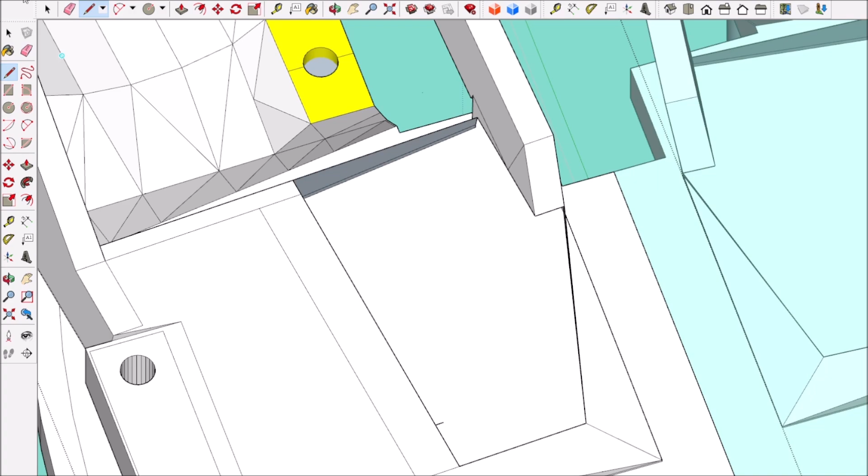But this video here, I'm just going to show you. It's one of these things that when I have these prints available on my Patreon, I want to make sure that the supplies that go into this animatronic are going to be available to y'all, like servos. And I'm doing two different versions of this, and what I'm doing is I'm replacing these servos here with these other servos, and these are cheaper servos and they're available, but I just want to make sure that all the supplies for building this animatronic are going to be available. So let's get started.

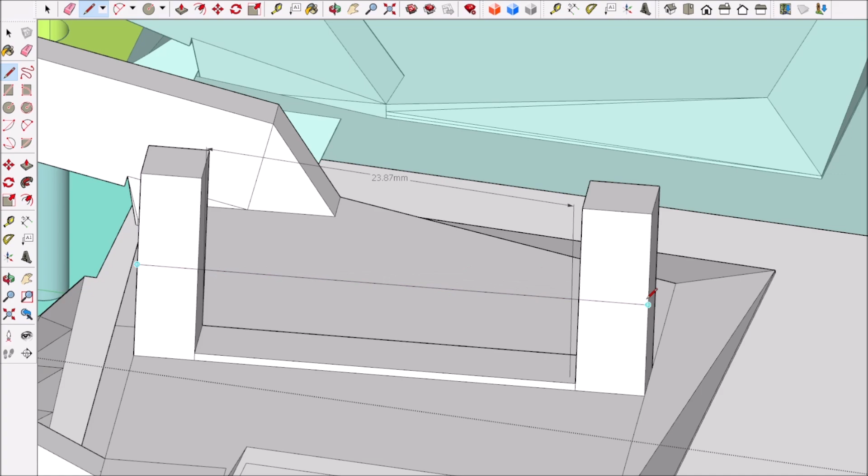I basically just replaced the servo sockets with the horizontal tab screw points. That way, instead of screwing down, they screw sideways. And it's a standard looking servo, because most people don't really realize that wing servos exist. They're pretty neat servos, but finding them small is rare. There's not too many available that small.

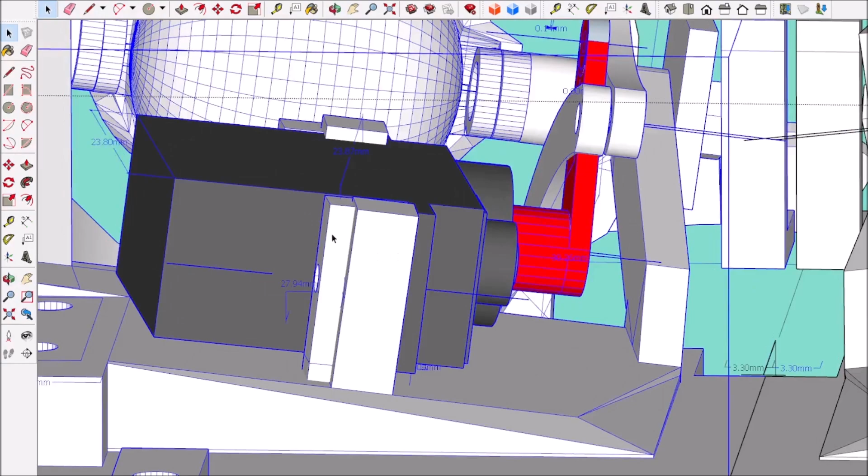And the whole reason why I'm doing this animatronic is mainly to put skin on it and have realistic movement, but for me to put skin on it, the whole bust of the alien creature that we're designing has to fit a resin printer. It has to fit into the printer so I can print that, and then we're going to mold that sculpture or that head bust so we can produce the skin.

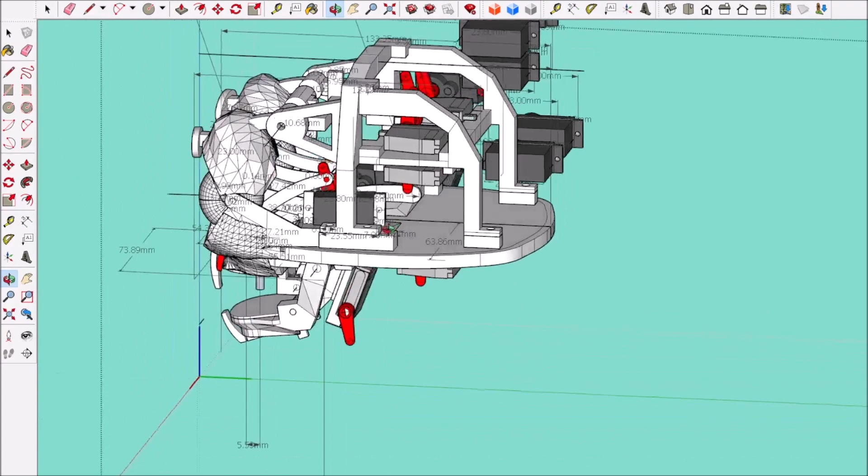But here on this servo, now I just laid this servo in place. With the original wing servo, when I first started designing it, I started with the eyelids and the eyeball, and I worked from there. But it was on a flat plane when I first designed the eyelids, and then I rotated it with that wing servo. Here I'm just laying it in place because the servo is just a part. It's not going to be printed, but it's going to be at the right angle so I can see that the linkage this servo moves is correct to move the eyelids. But mainly it's just to get all the servo sockets in the right position.

Now these servos here did have a servo socket that I had previously designed, but I went ahead and just started designing it straight off to replace it. That way it wouldn't be off, I guess not square to the tilt position it was already in. So I just decided to go ahead and design it from here.

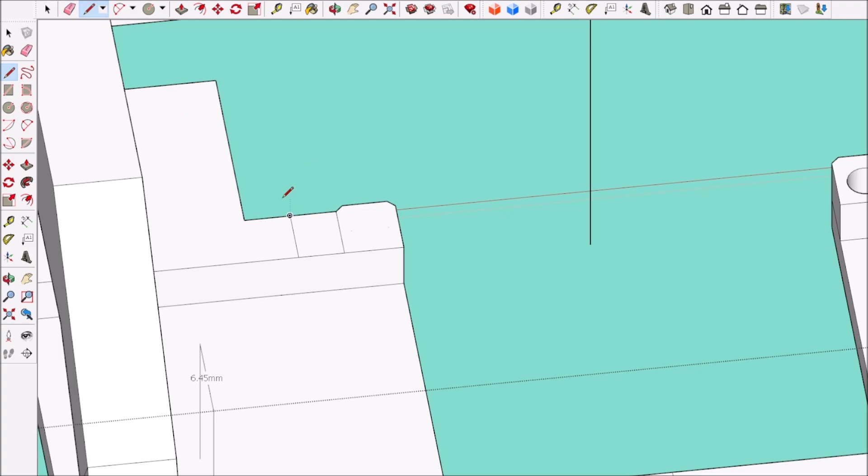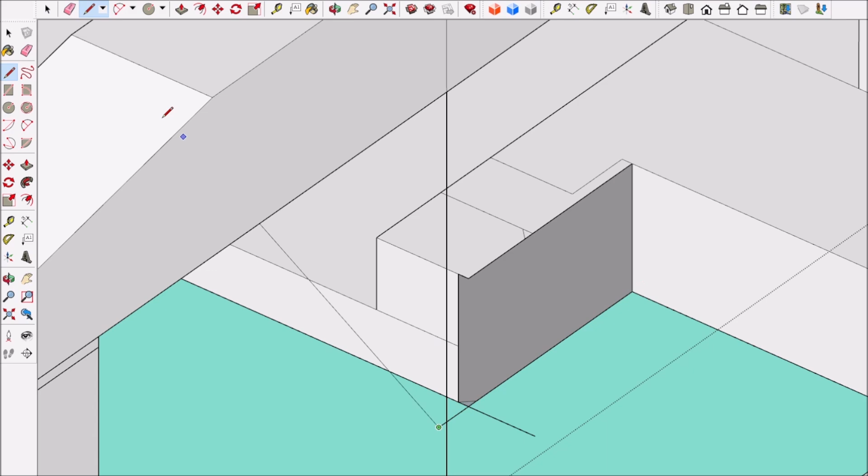But like on the scaffold, I just removed the screw points and squared everything off, and then adjusted and made these little posts, I'll call them, and they just come straight up so I can put screw points there. And then I also have to look at a profile view to make sure that I can get the screwdriver to go that direction, so I'll have an access point to that screw. But it was quite simple to do. Like I said earlier, it was only 2 hours of work to replace all 8 servo sockets. I just wanted to show you, and it was pretty quick and easy.

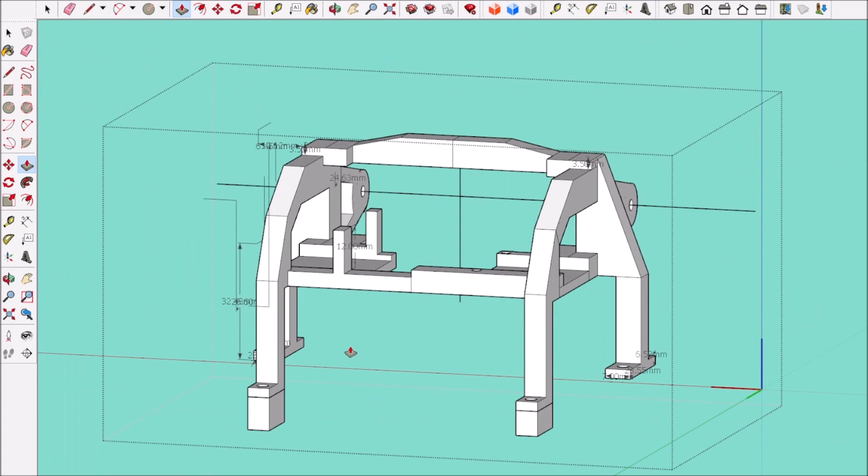But I've not got a final design yet. It's getting close, because I've been working on this not quite a month yet, and it should be getting close to start finalizing all the designs and getting ready to do some test prints, just to make sure that all my servos have the right socket, because there's tolerances. Like if something is 30 millimeters and you're going to make a socket, you can't make it 30 millimeters. You should make it 31 millimeters for the socket because you need it to go in, and that's basically called tolerance.

And when I'm designing these things, I print primarily with PLA, and eventually I'd like to print something a little bit stronger. But these tabs might be a thickness of 6 millimeters, which is okay, but I still like, I'll go 7 and maybe 10.

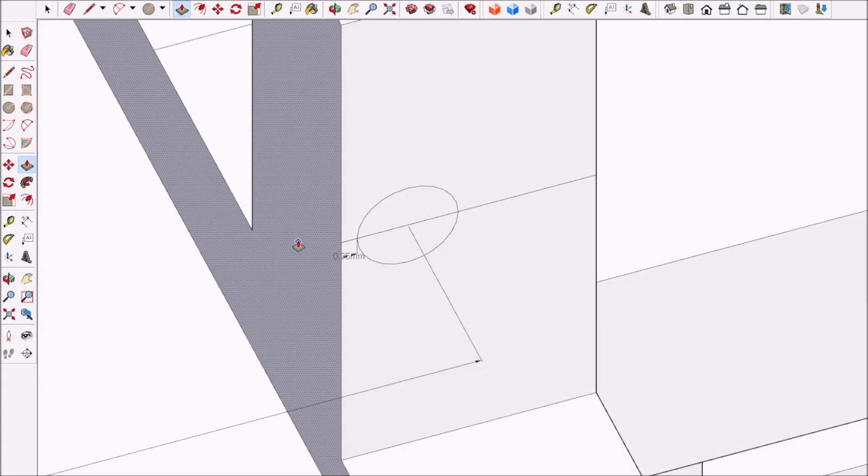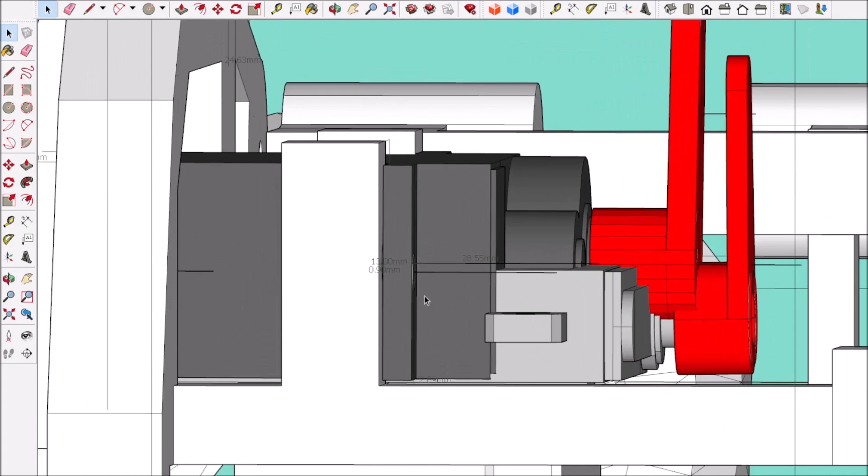But then there's other things that you have to calculate. Depending on the servo, they have a grommet coming out of the side where the so-called servo arm is, and that grommet is like a little rubber gasket around the wire. It's 1 wire, but it's 3 wires, and you've got to make sure you have clearance on that post, because if you stretch out that post too far, you're going to bump into that wire and it's not going to work. But that's just foreseeing what you need to do.

And when you do enough of them, you get where you don't want to mess up. And that's why I keep designing and redesigning. And plus, I want y'all to see what I do to produce this, so some of y'all are going to be true designers of what you want to create. And that's the whole goal of this channel, I want you to see what else you can make with a 3D printer, instead of making benchies.

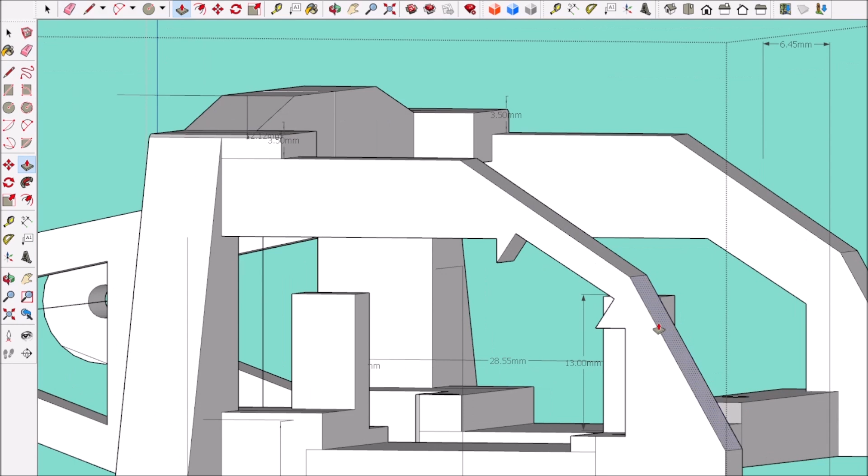Now this creature that we're making is going to have 11 servos, and that's going to be 10 channels that we're going to be controlling. So 11 servos and 10 channels. The reason why it's 10 channels is because 2 of the servos are going to be mirrored. So two servos are going to be on 1 channel for the eyelids, and they're going to be mirrored with a Y cable and a servo reverser.

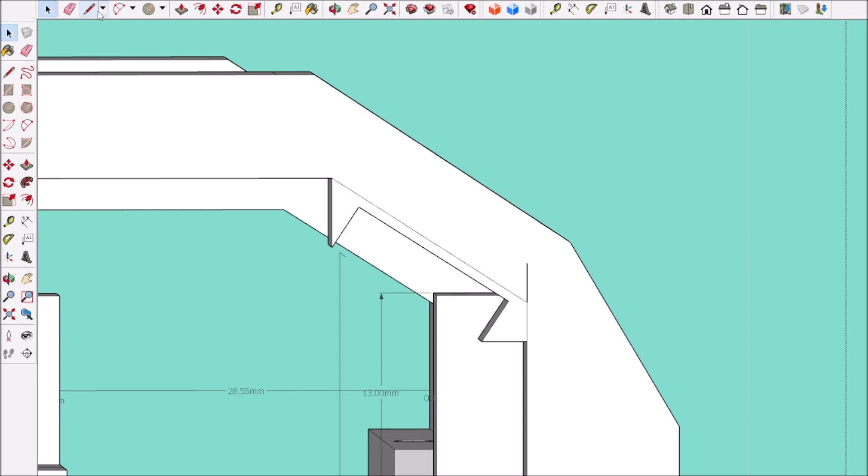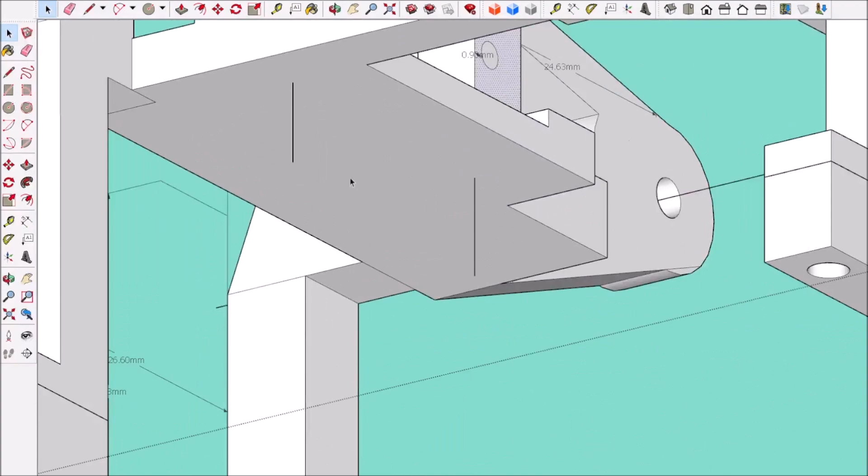Now, on this scaffold right here, I'm making adjustments so I can make sure my tool can get to the screw point or the nut where I attach that servo to the servo socket. You'll see me sometimes on these videos studying what I've designed, and what I'm primarily doing is lining up that servo to what that servo is supposed to be moving. And I can put the linkage on the servo arm on the top or on the bottom. That way I can control it and have space to work with where I'm placing the servo socket.

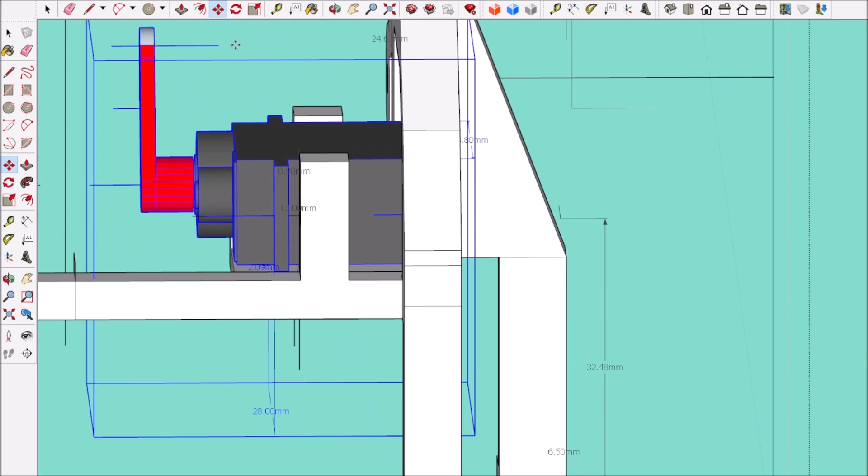But here is what I'm concentrating on: if I just do one side, I can mirror the other side, because I noticed I have another servo on that side, so I'll just cut this in half, and it'll be less work and more accurate. But I don't want that servo too close to the other servo, because I don't want those servo horns to bump. And like I said earlier, I can put that linkage on one side or the other. It all depends on what kind of room I have.

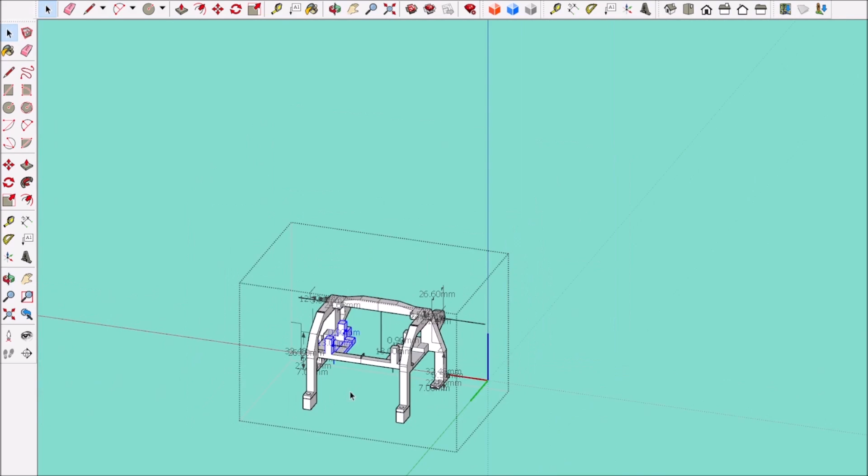You can see here how I'm lining up the servos that are going to be lifting the brow. I have two brows, that's those two servos we just replaced. And now I'm going to place a servo on the bottom of the left one here, and that servo goes to the upper center lip. To make it easier, I highlighted this servo socket that I just made, duplicated it and flipped it, so I could put it underneath there, and that is going to lift the so-called center lip.

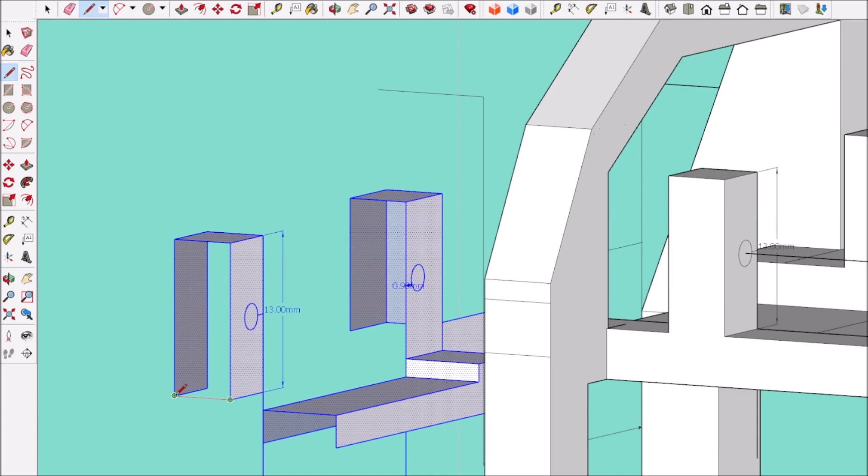I've been designing a lot of these animatronics where it's pretty much line of sight, where the linkage is straight on to the servo horn. Now, if it's up or down, I can curve and rotate or angle that linkage arm to the part that I'm trying to move.

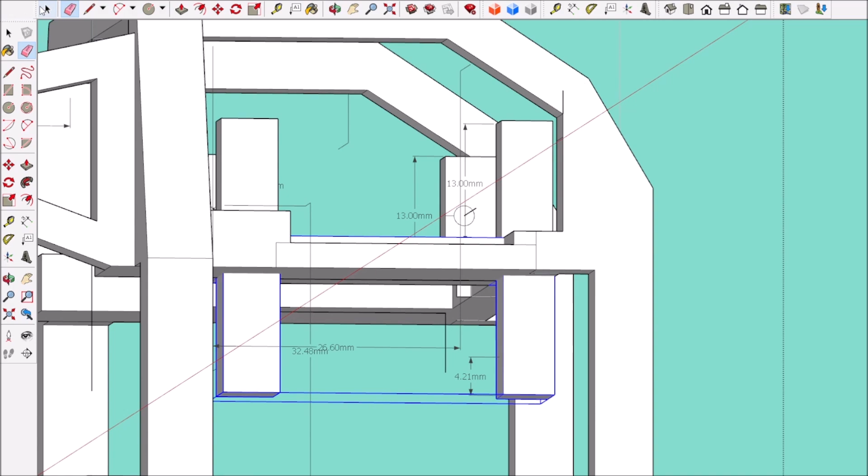I just clean up this servo socket and get it right, then I do a flip and make any adjustments that I need, and I can drag the whole servo over there and fit it into the socket. But this one here, the other day I designed a linkage arm to this servo to move that center lip, and now I can push that servo socket closer to that arm, move it a little bit more to the right there, so it will line up in line of sight.

You know, basically I just kind of laid a lot of the servos in there before, on top or inside the other servo, the wing servo, and I just removed those servos after I get it designed, because I'm kind of matching up the servo arm, because they're basically the same shape. They do have the same screw points, but these are sub-micro, micro.

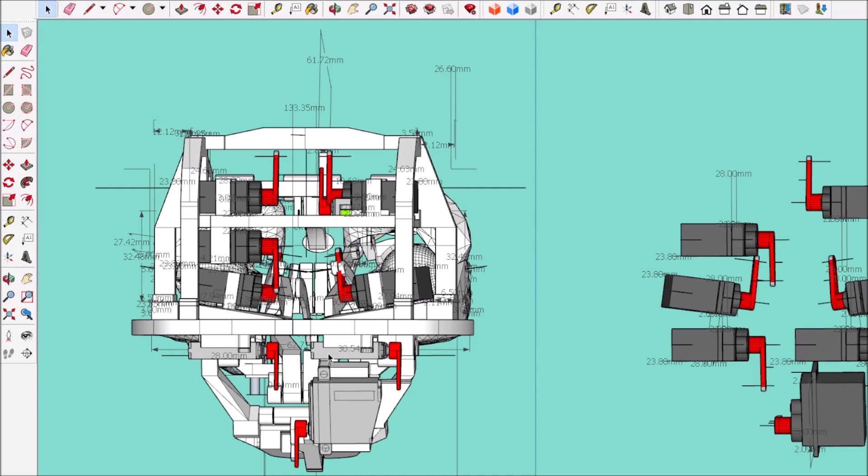Now you'll find out that with servos, once again, there's nano, there's sub-micro, there's micro, there's mini, there's standard, and then there's large, and then there's giant servos. And once again, there's thousands of them, and there's thousands of manufacturers. I'm saying thousands, but a lot of them are rebranded servos. You'll see a lot of servos where it looks like the same one, but they got a different name or manufacturer name on it.

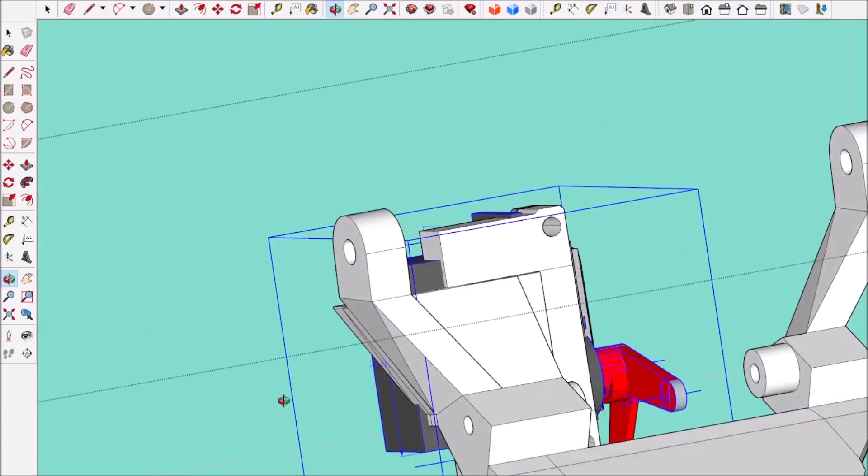But there's some servos that I just don't bother using. If you've seen the cheap servos where you can get 20 servos for $20, I don't even bother, because even if you just buy one, it either is too loud, or it's just not dependable, or it's no torque. And don't get me wrong, there are some good cheap servos out there, but when you're moving something, you got to really study the torque, and I do a lot of tests, and I test some of these cheaper servos just to see what they could handle.

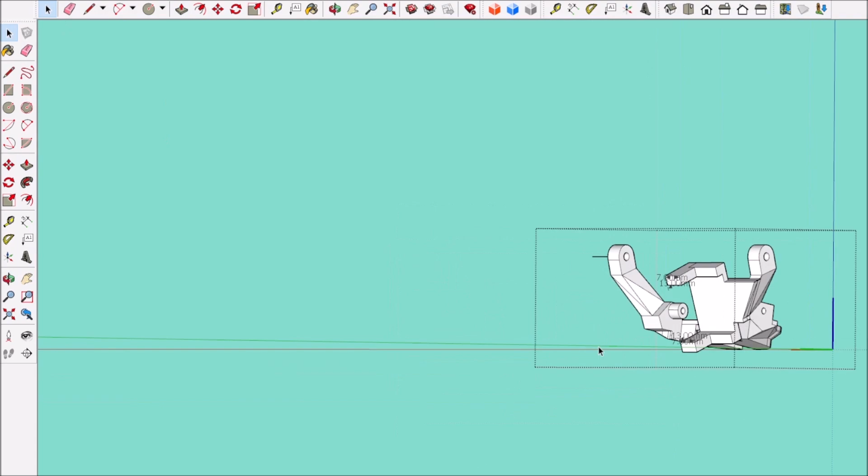It's just like that little creature that I made. It was a small creature and had 3 servos in the head. Those servos had enough torque to move that thin skin, and this skin's also going to be thin, and I'm sure it's going to move it, because the torque on these, they're really good servos, and I've been using these servos that I'm putting in here for about four years, I believe.

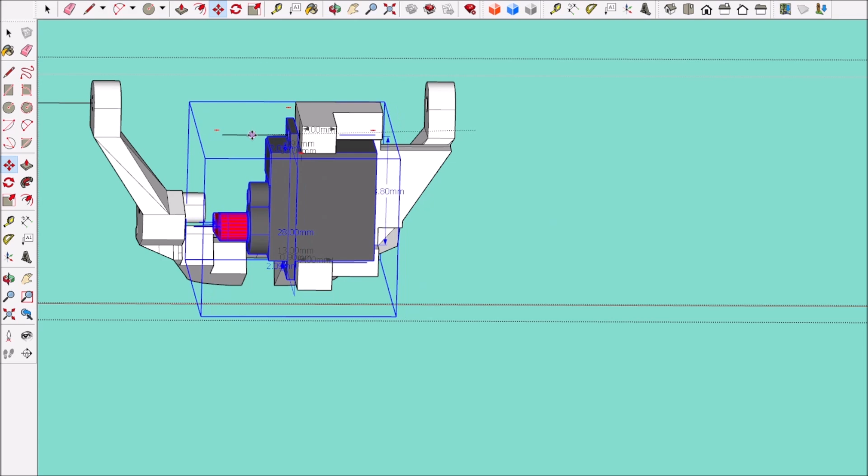But replacing the servo on the jaw, this is where I have to make adjustments to this servo, because the wing servos are 6 millimeters thickness. These servos are 12 millimeter thickness, so you're looking at double the thickness. But they'll still work, and it's going to be hidden behind the jaw. So it shouldn't have any kind of interference. That one servo there on that jaw is there to move the lower lip.

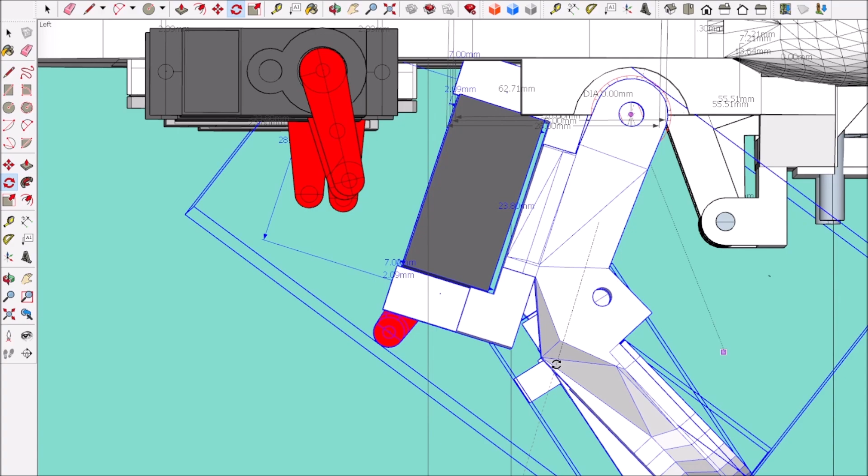But you see here, I'm going to have to make adjustments to the so-called servo socket, because I'm only able to move it 30 degrees opening. But when I had the 6 millimeters thickness of the other wing servo, I had more room. I mean, there's only a certain amount of openness that you'll have on a jaw anyway. But I can make adjustments so we can get at least 40 degrees.

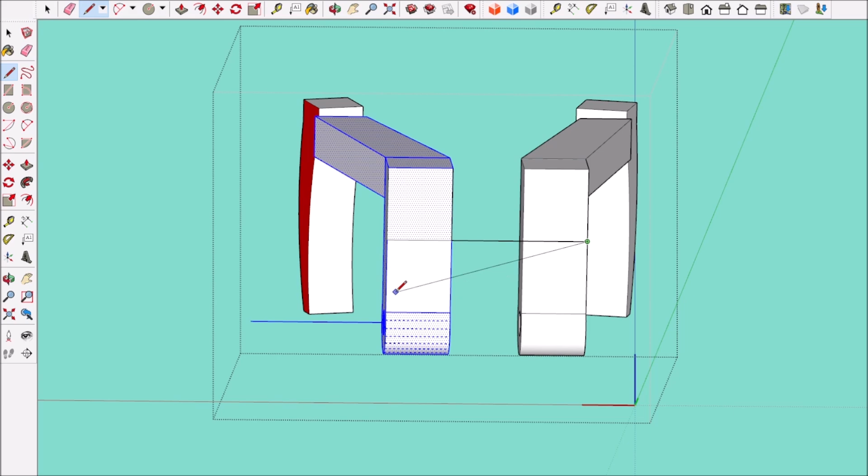And being in the design stage right now, I could change the jaw by lowering it down some, but I would have to make adjustments to the teeth, and that would be another design of the teeth. But I have them on file, so I can just manipulate those to fit that socket.

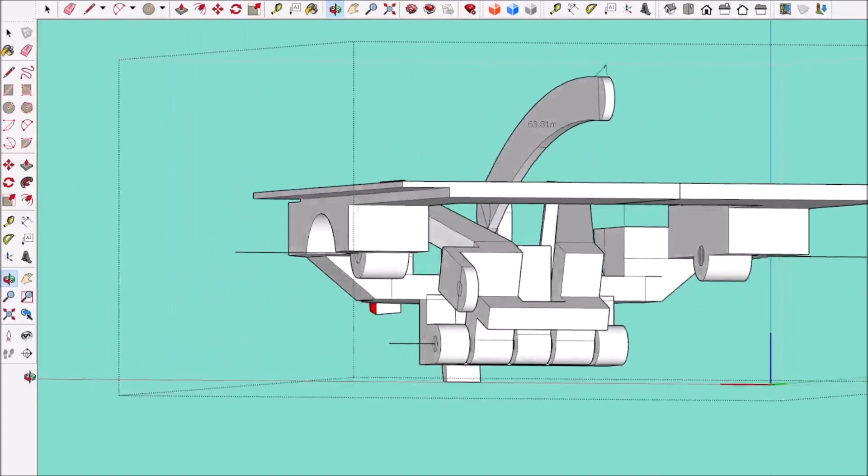Now this upper center lip, this is the fork lip. I have to add this piece right here, and I still need to make adjustments. Because I'm using the same axis to rotate the center lip and this fork lip, I needed to connect the two, so I had to make a crossover beam. That way it will have the two as one. But I still need to make adjustments, because even though this is up and given clearance, if the fork is down and the center lip is up, you don't want it to bump into that support, that so-called beam.

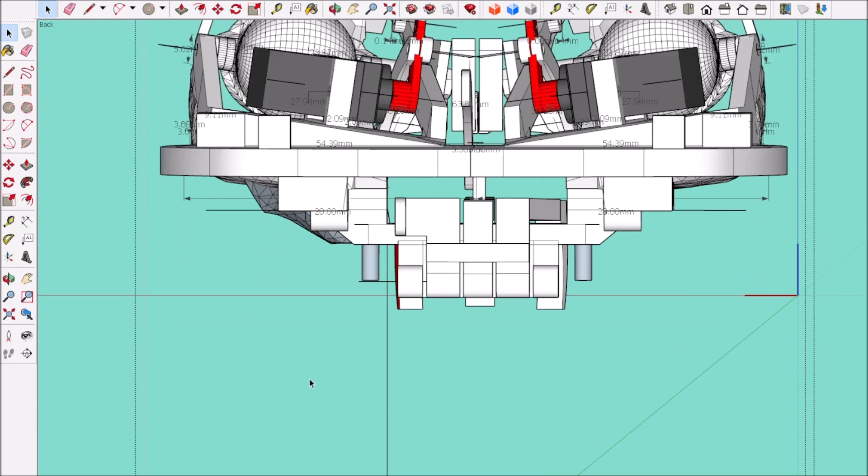But here now, I've added that tab there, that linkage tab, to that fork. And I just need to make sure that it lines up to that servo where it's going to be on the bottom panel right here. I have two more wing servos to replace, but also I'm moving this jaw to make sure it has clearance, not only from bumping into those servos, but I need to make sure it's not going to be bumping into any linkages either.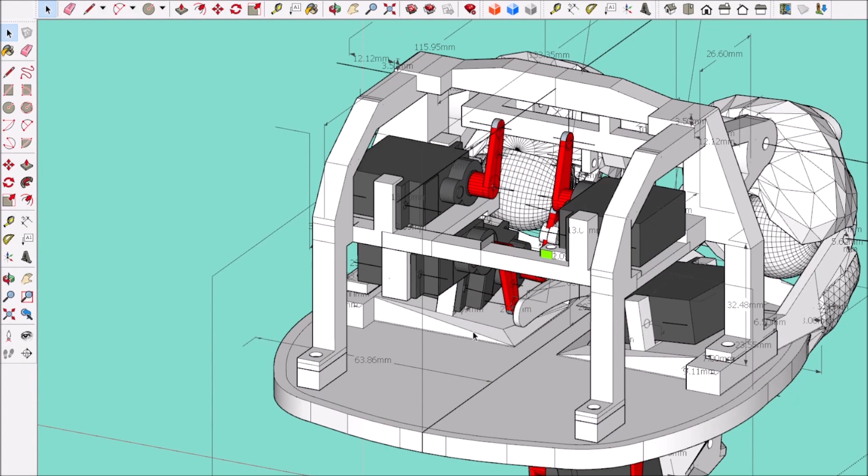But here you can see where I'm moving that. This is the center lip. And with these servos now being thicker and bigger, I really don't have a whole lot more room to put others. Now, don't get me wrong, there's going to be other animatronics we're going to design, and we're going to load them up with a bunch of other servos in it. But if we have small servos, we can have a lot more space to work with.

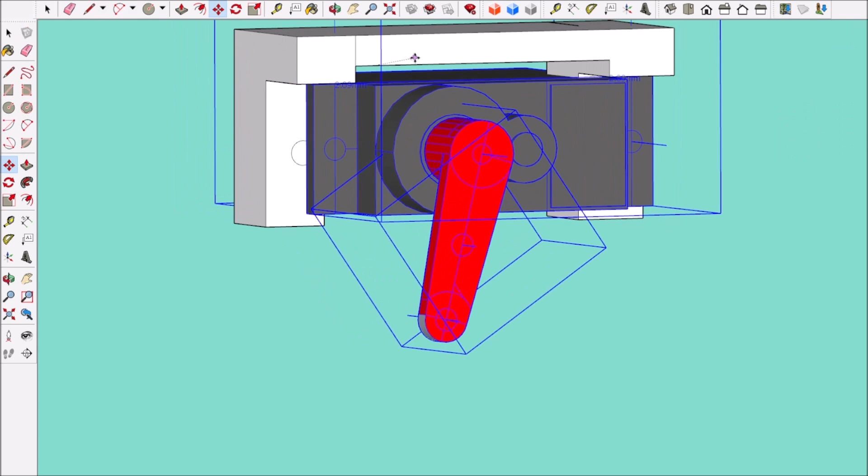But once again, to have that lower lip move also is a big key of having realistic movements. And I had to make the servo work directly, mechanically on the lip instead of using a guitar string or a cable push-pull method. It's more subject to fail, in my opinion, and it's better to have a hard linkage going directly to it. And the only way to achieve that is you have to mount the servo onto the jaw itself.

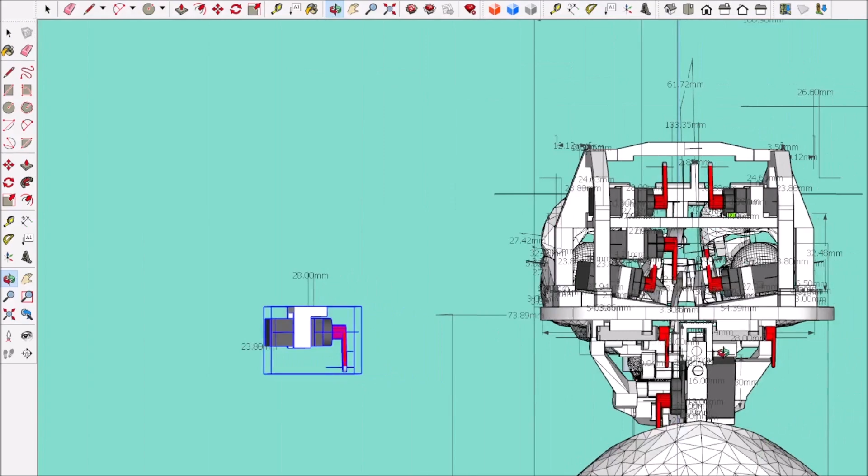It won't mechanically work that way if it's not on the jaw. If you had it off the servo, it would have a conflict with the jaw servo. And so when the power's on, the servo arm is locked because it's in a lock position until it's commanded to move.

But I wanted to show y'all this process. I wanted to show y'all the whole process. I know some of y'all maybe just like printing, and some of y'all like designing. I just want y'all to see the whole process. And like I said earlier, I might have been working on this a month, but a lot of this stuff has come from my previous designs.

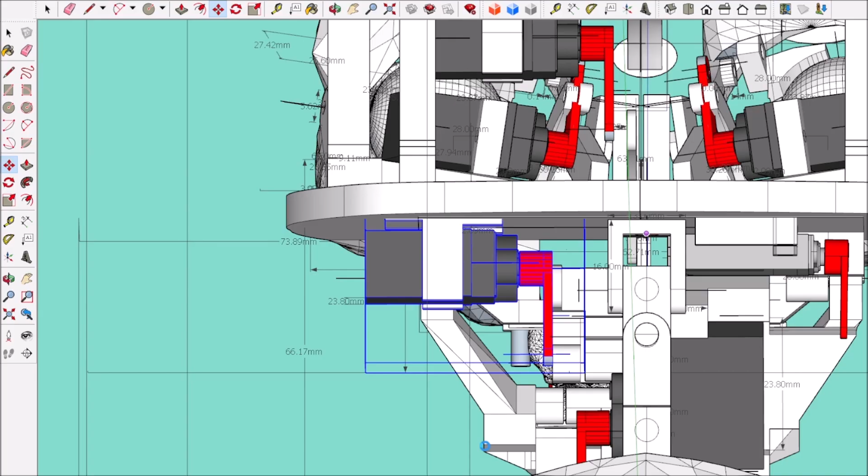And we will go through a whole setup in a future animatronic build, where I go through the whole process from start to finish, from a sphere to the eyelids and so on and so forth. And like eyelids, there's two different kinds of eyelids. You got a blink mech, and then you have a floating eye mech eyelid, where you have eyelids designed with countersink holes where there's no straight-through rod going through the sphere and the so-called eyelids. There's that method too.

I'm willing to share my knowledge that I've accumulated on doing all this, and I learned from it, and I learned from my mistakes too. And trust me, you will make mistakes, and you try not to. No one doesn't.

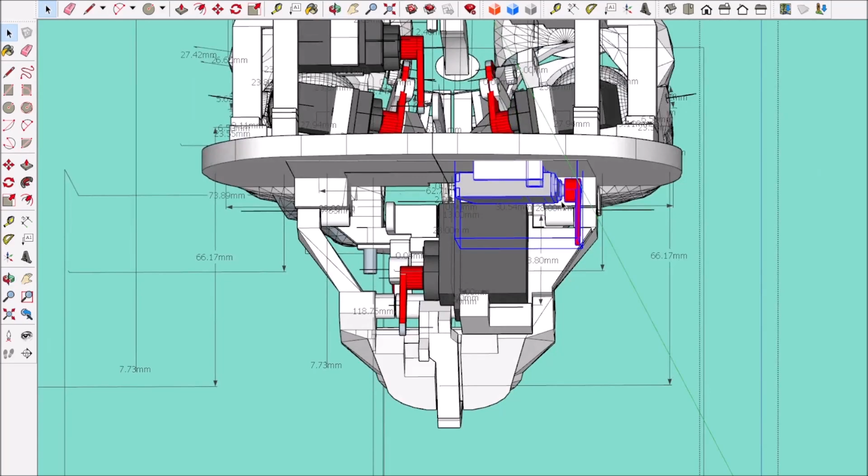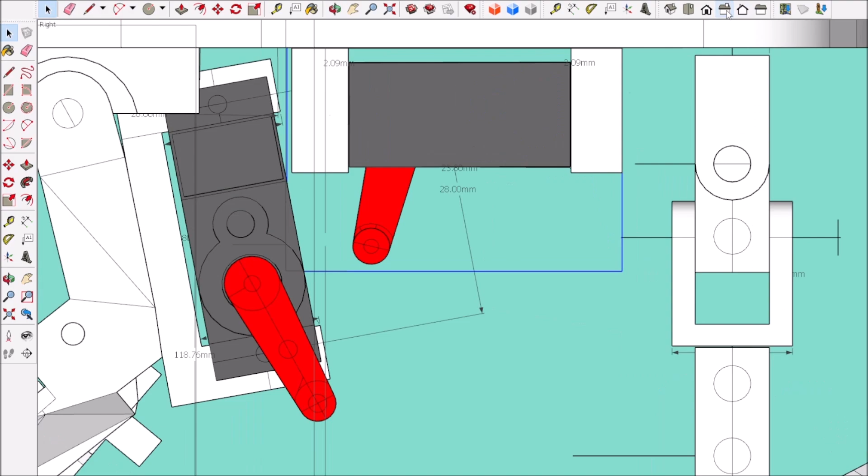I had a person ask me a question today. One of the subscribers said, should he get ZBrush? Hey, ZBrush is a great tool, and they have subscriptions, so there's a cost factor there. And this channel here, I'm trying to do it as low cost as possible. There's a lot of great software out there, and some are free and some are really expensive. Trust me, there's software I'd really like to have. But once again, it's a learning curve for every software. But Blender is free, and it does pretty much everything.

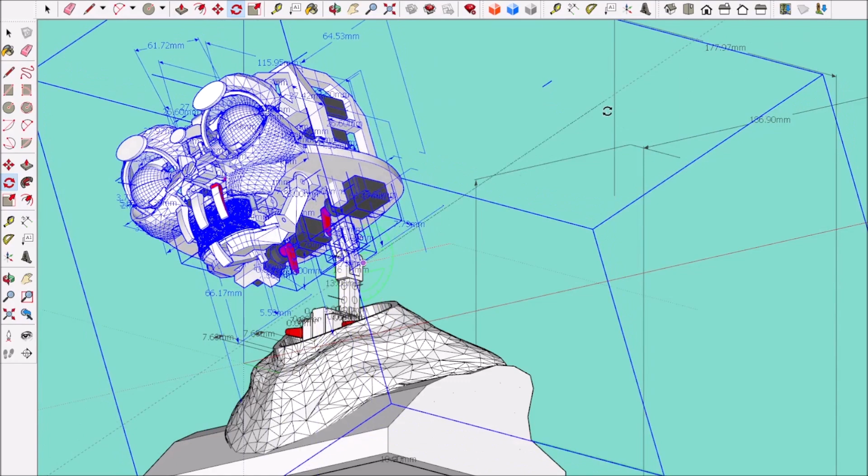But there's pros and cons to every software, and there's some that are really good on measurements. The only reason why I got, I guess, obsessed with SketchUp is I like the measurement tool. And when you're designing these animatronics, I love how the metric works. Probably 4 years ago, I was doing everything in Imperial, and I kind of learned that when you're designing anything, it really needs to be in metric.

We all have the passion for animatronics, and I really enjoy animatronics and love designing them. But there's like two types. There's the kind that you design from something, like you're working outside in. And this creature that we're doing here is inside out. So it's kind of reverse engineering.

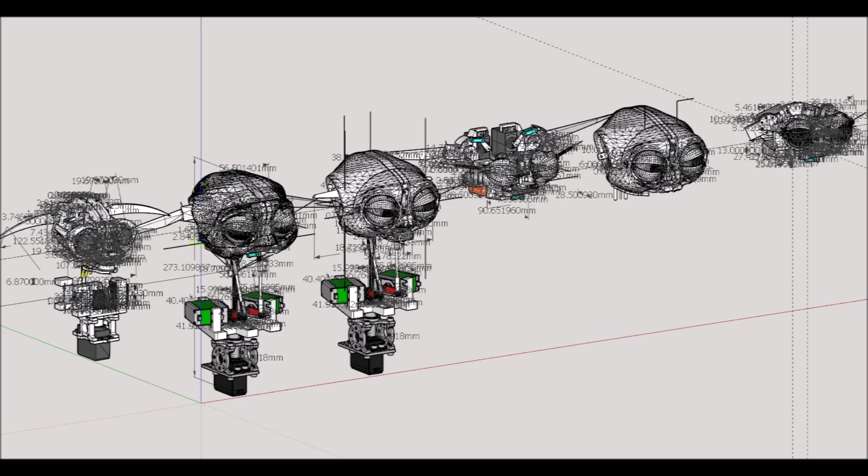But I designed several Grogus, and a lot of people had certain measurements that they thought it was, and nobody really knows except the original designer. But as you see here, I made a lot of them. It was a challenge and fun and a learning experience. And after a certain amount of time, you get kind of tired of doing Grogus.

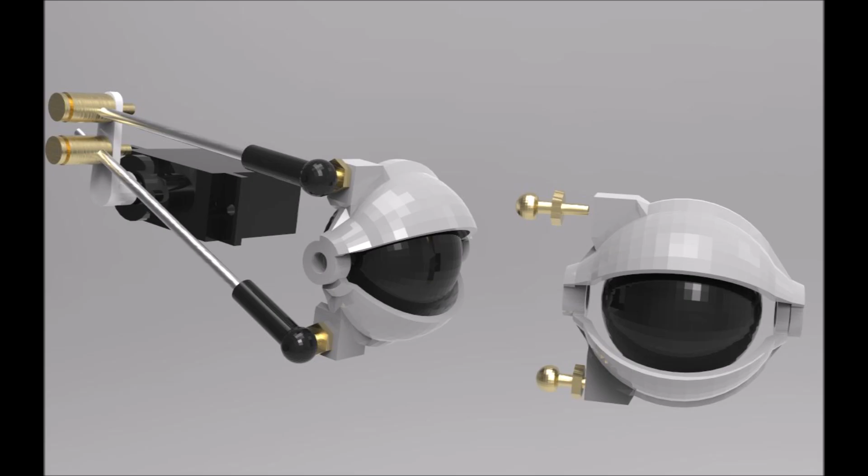But as you see here, I had to get a part from it, the magnet part, the socket, so I could put it on the alien creature that we're doing now. But this is what I would send to the people that would purchase my files: a kind of instructional video on how to put this Grogu together, and a lot of these parts have disappeared.

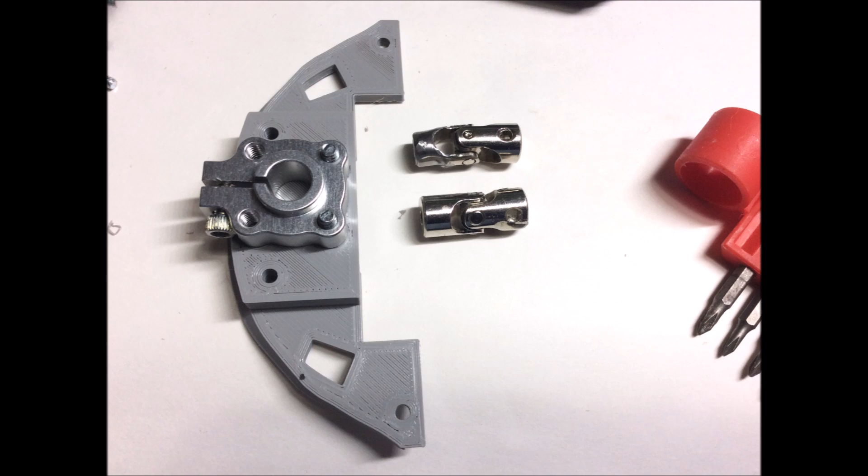And as far as ServoCity parts, they were pretty much Imperial, and now they're going all metric, and some of their metric parts won't fit it. So I'm going to have to be redesigning this and probably put it up on the Patreon, and that will probably be later on. But I just wanted to show you this process, what I went through on designing some of this Grogu stuff. But it was an experience.

But I would send this instructional video and some pictures just to help them put this thing together, and they would experience the world of animatronics.

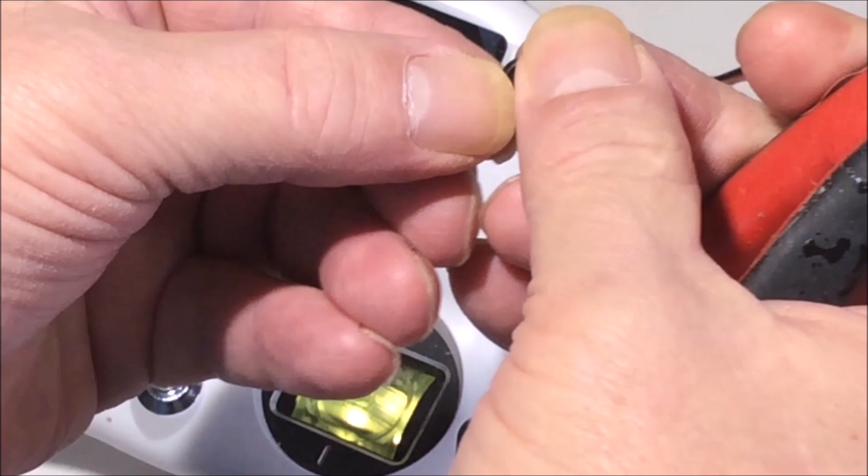Centering a servo: power on, it will automatically center. And then this is a servo horn that we're going to use, and what I'll do is I'll just snip off this end of this arm right here, and then I'll line it up to where it needs to be.

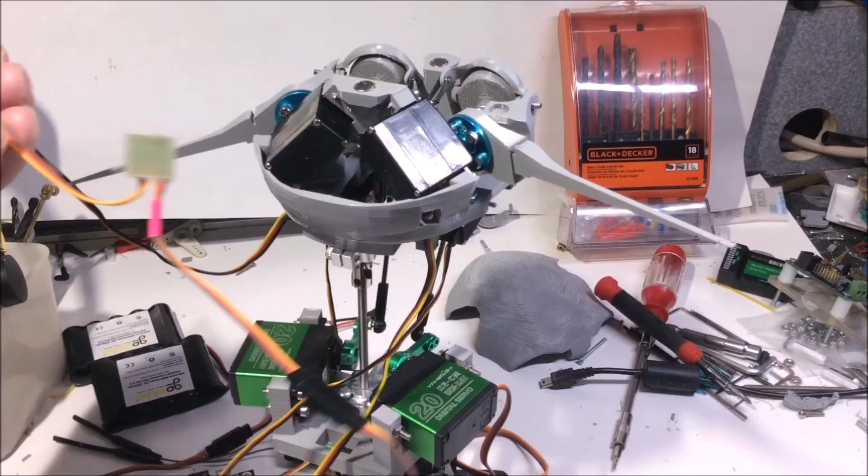This is connected in the ear servos, which is the 225 Mighty Mites. This is a Y cable. A Y cable is where you connect one normal and then you add a servo reverser. That way you can mirror the servos, as you see here.

Here is the linkage for the eyelids, as it's connected to the eyelid controller, and it's kind of a loose fit. It's still tight with the nylon nuts. This is the metal servo arm, or the disc. I never could find the right thread.

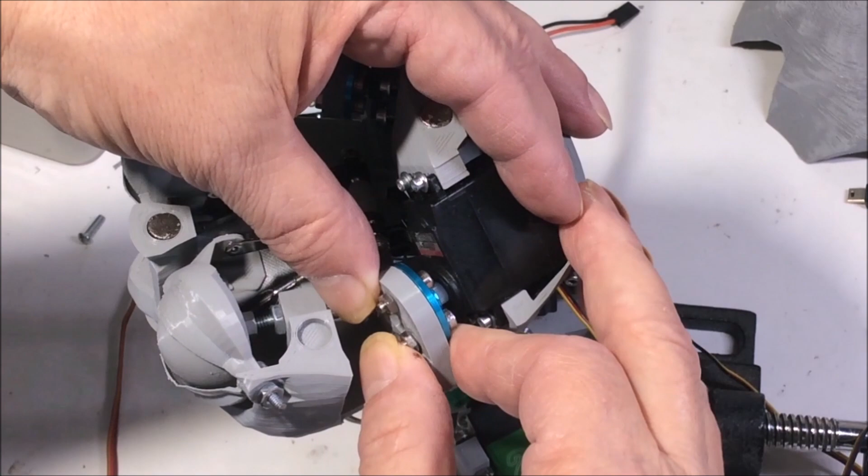It was M2.5, so I just went and drilled them out and put M3s, and then I'll just place it on here, so I can mirror it to the other side, and this has the Y cable with one of them having the reverser.

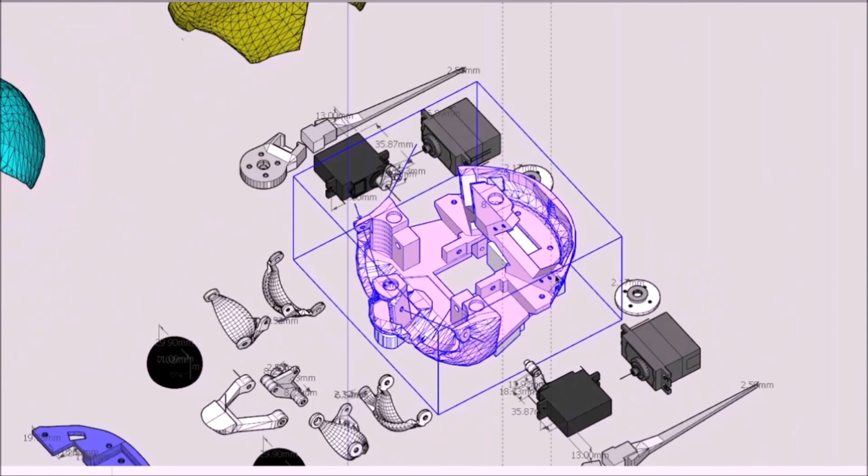Hello, this is Gary Willett. I'm going to show you how to put this thing together. And this is all some of the hardware and some printed pieces. With the ear servos, I'll send you some other parts for the ones that are going to have real skin on them, because the long pieces of the ears are mainly just for looks. You won't use them in actual skin because they won't tolerate it.

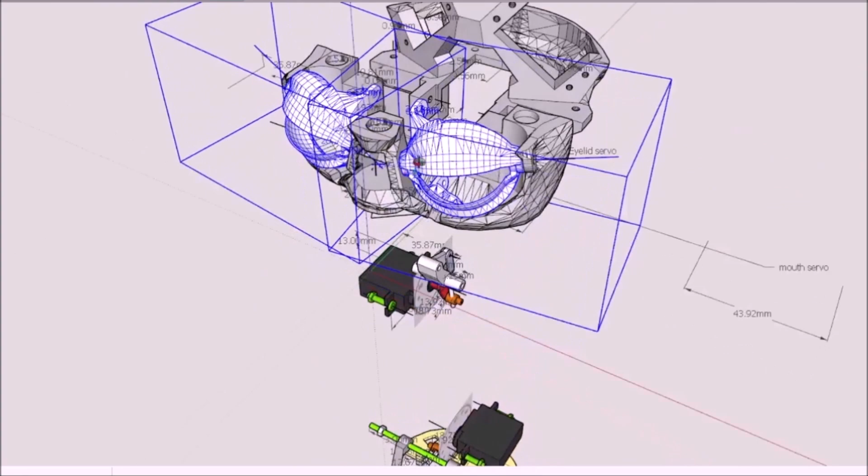It's not strong enough. And the upper lid and lower lid will have magnets and one will have pegs. But this is the main unit. This has all main servos and controls. And the eyelids can be kind of fun to do and can be kind of tedious because there's really not a whole lot of room in there, but I have made smaller. But you just put them in there one set at a time.

Then you kind of open the eyelids after you get them all set with the flathead screws. And these screws are 4-40 screws. And on the outside, and maybe on the inside too, you could probably use nylon nuts. But once again, I just open these eyelids up, and this is the closest I can really get to show a quicker way without the messy bench.

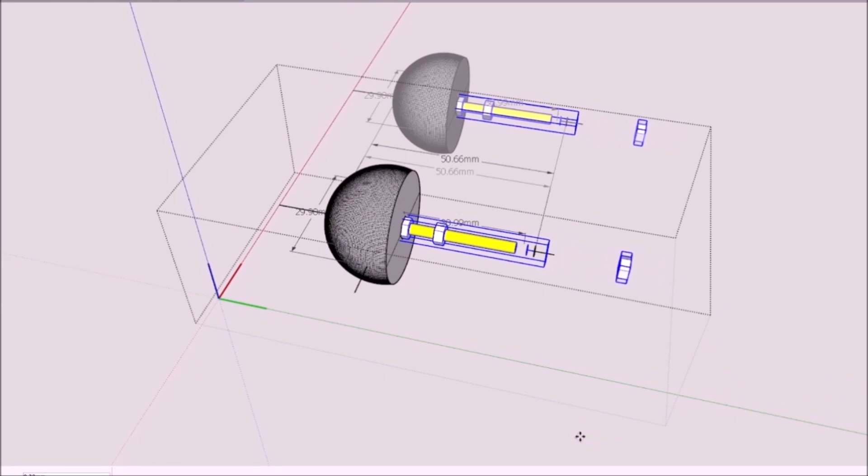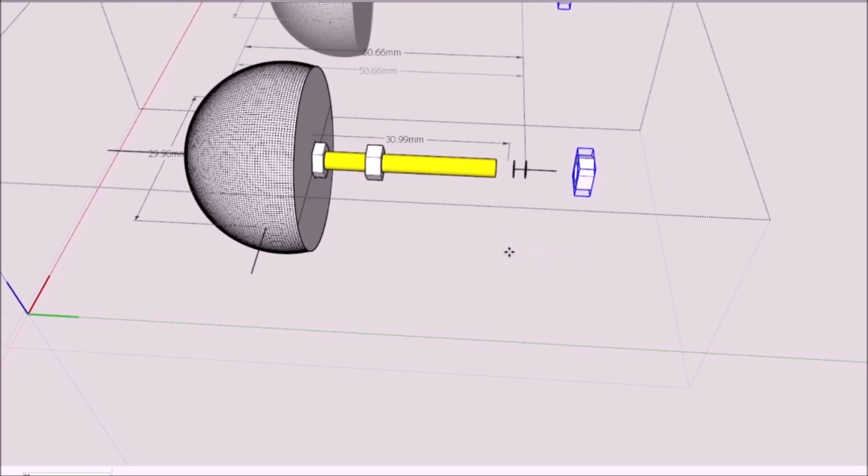And these eyes here have a standoff, and this rod here is a 6/32 thread rod, and you just have that 6/32 standoff, slide it in place, and it can be a tight fit. And if it's a little loose because the tolerance is really close, you can just drop a little super glue or a little epoxy on there and keep it in place.

But you just pretty much thread it on through, and then you tighten your pressure nut, and then put on a nylon nut on the end if you prefer it. I just don't want it to back out, especially if it has skin on it. It's going to be a set deal. Excuse me. But just finding the tools to get it in the small space.

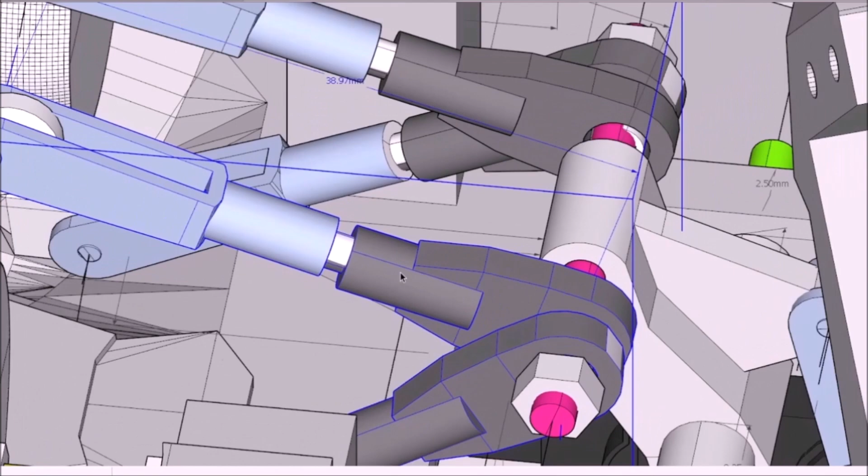But it's really fun. You can probably put this whole thing together in a couple of hours. But as you see here, the distance between the eyelid and the eyeball can get pretty close. Now the linkage here for these little ball joints.

Now for the upper lid, these ball joints need to be cut. And this rod on these is the 256 rod. And I cut about maybe 4 millimeters off of it. You'll still have plenty of room to thread it in there. And then you just kind of remove it.

And you can do it, I didn't do it with mine. I'll show y'all a picture. But it works out good. I mean, it's making linkage to make it work and be more reliable.

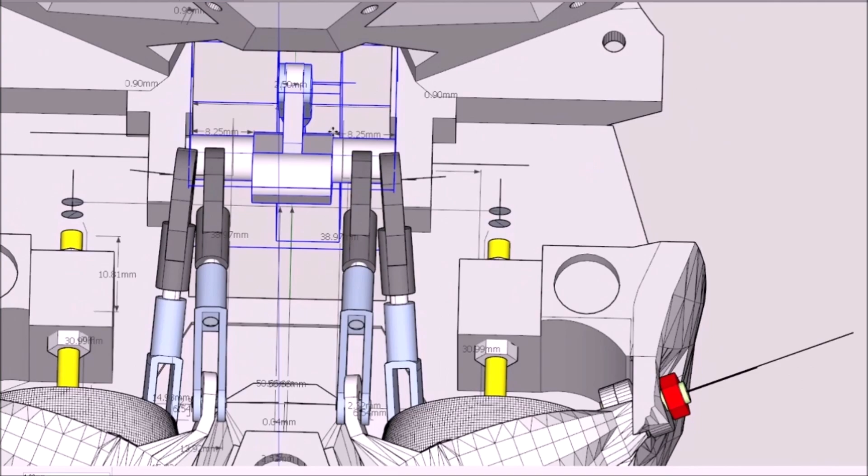Now, the eyelid control mechanism is here, and you'll have a rod that will go through, and its main rod is a 440 rod thread. And you might be able to find a screw that length, but I couldn't find them at even a local hardware. I know they have 3-inch, but you could probably make it. But in my designing, everything is metric.

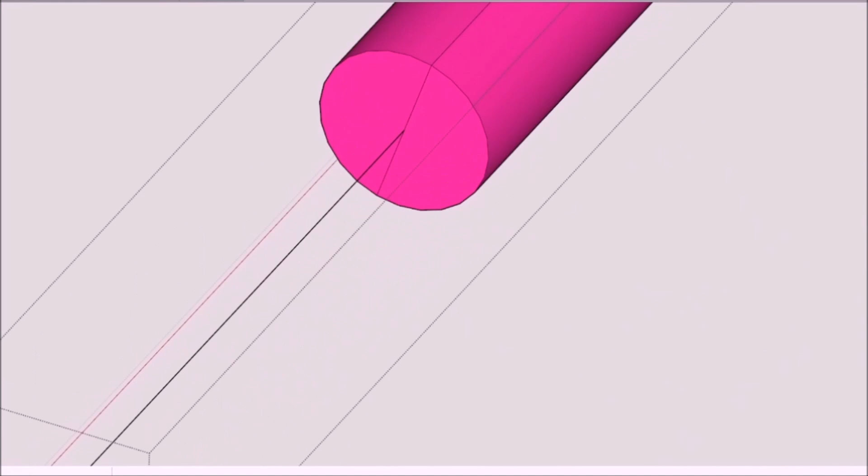But once again, you just put that rod on there, and you'll seal this off with the nylon nuts, and then you make sure your upper is first in the thread, and the lower lid is on top of the upper lid. And then you put these nylon nuts on, and don't tighten them up against the ball joints. Just make them tight on the rod itself, and leave it loose. You can touch a little bit, but not put a bind on them.

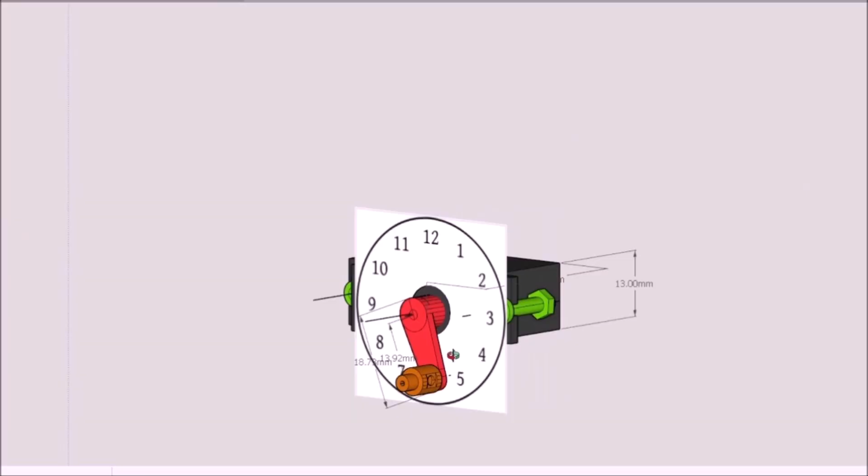Here is the linkage for the eyelids, as it's connected to the eyelid controller, and it's kind of a loose fit. It's still tight with the nylon nuts. And then as far as setting the servo up, I put this little clock on there just to show you. It's basically at like a 5 o'clock position, but you need to turn the servo on first, make sure the servo's centered, and then you put your arm in there.

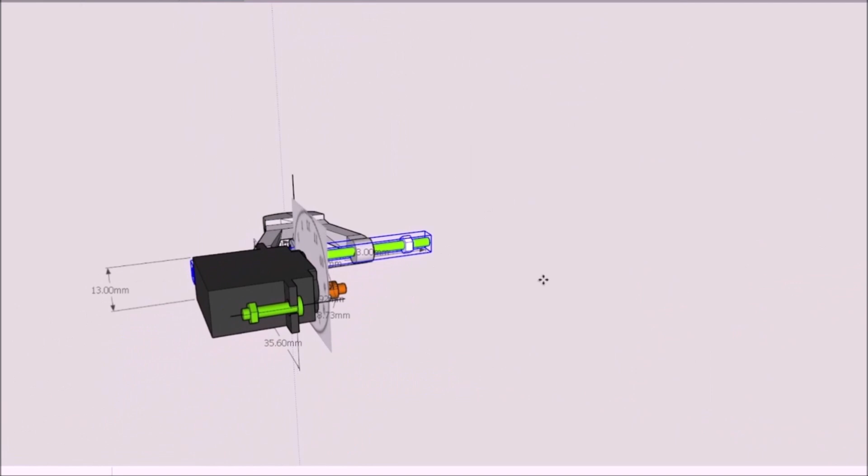And then that stop link, that's the little brass fitting that's on the servo arm. It will thread that 256 rod to the linkage, and it will be tightened down to hold that in place. Sometimes them holes are not large enough for the 256, and you can just drill them out with a drill. Just make sure you remove your screw, and then drill it out, and it'll screw back in place to give a tighter fit on that 256 rod.

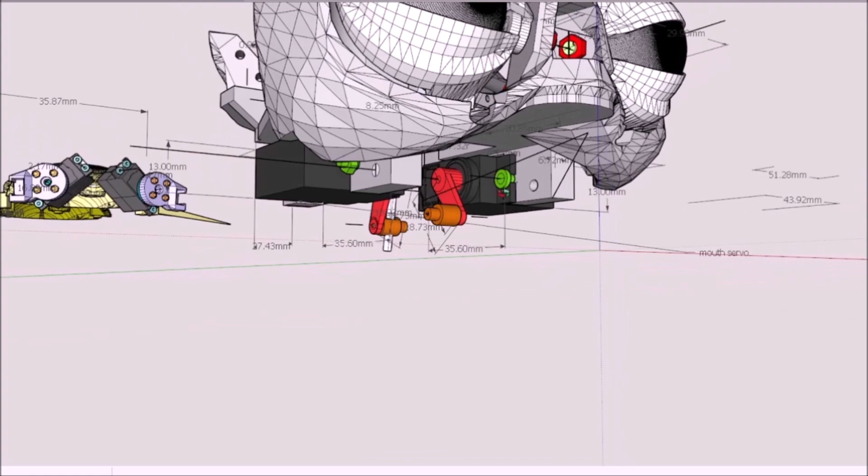Now, the screws that I have on these lower servos are 440 screws, and you just bolt them down. And then you center this mouth servo, and it's at more of a 4:30 position, and then once again you power up the servo, making sure it's centered, and then you set your servo arm. And it's basically the same way you did the eyelid servo, but you have them opposite from one another.

And then you put the mouth, and the mouth also has a 440 support rod or hinge mechanism rod. And then these parts here, I'll send you these parts. These are the newer parts I made just the other day, because I've been working on the core, and they were coming out of the core skin. But these are 440, and that connects to the linkage for the so-called gimbal. And this is the gimbal mechanism.

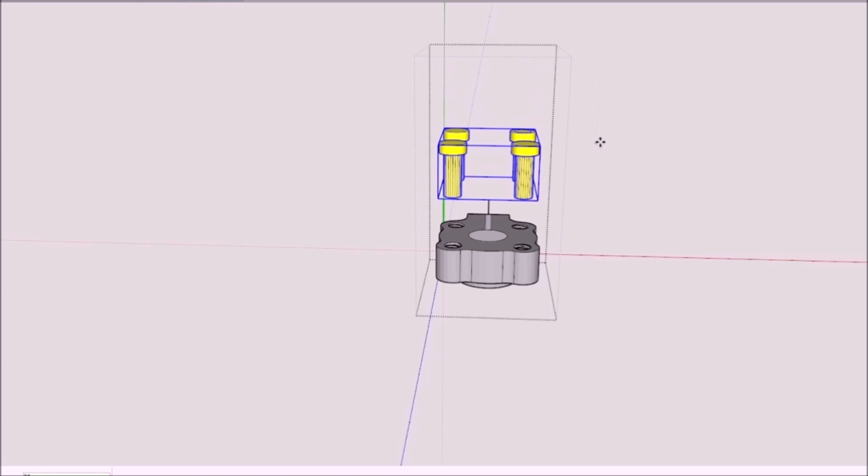This is the main support of the skull that's supported by the gimbal. And these little hubs, these are 256. No, I'm sorry. These are 6/32 screws that hold, and this is from Servo City. And they've made some recent changes to the size of these U-joints. They used to be like 9 millimeters in diameter, but now they've changed it on me. But that's what y'all have ordered.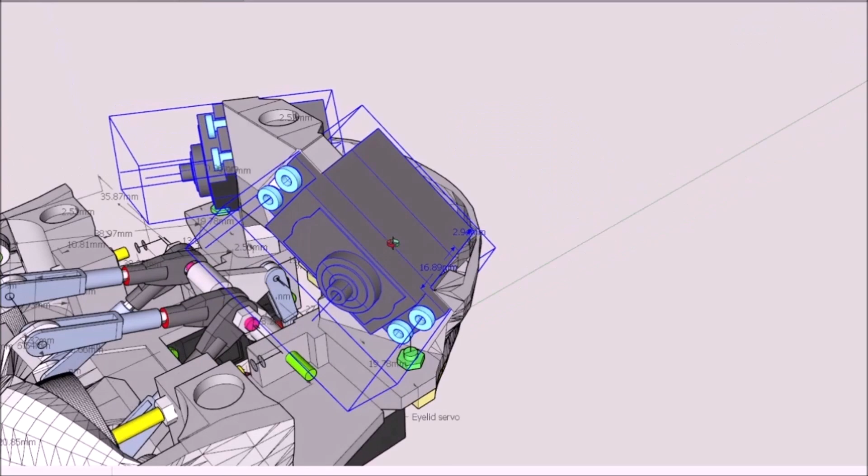You just tighten that down. You sandwich. It's pretty common just to make sure nothing bumps into each other, but this is the tightest that I could get it. And these screws here, once again, are 4-40 screws, and you'll thread the larger ones down, and the other ones up, and you can probably use the nylon screws.

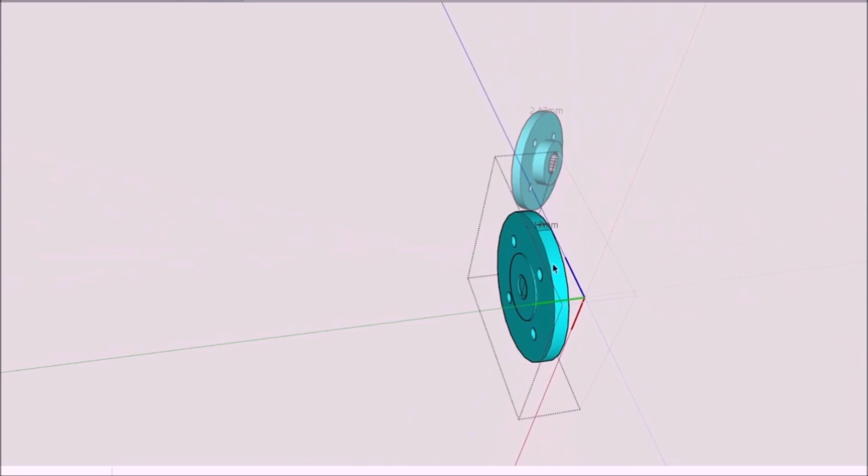All right, we're going to put the servos. These are 225 servos. These are what they call a Mighty Mite. They should support skin. There are smaller servos, but they're probably around $70 a piece. These little holes on the side are for the grommets. They kind of want to bunch up against the inside of the skull. Just make sure you test your servo, make sure they're centered, you'd have to put a Y cable and a reverser on there, and make sure they mirror each other.

Now, these servo horns are from China, and I never could find a thread. I think they're M2.5, but they wouldn't work, so I ground them out, drilled them out and put M3 screws to attach the ear print part, and I just put them in place and tested, and as you see, it works great.

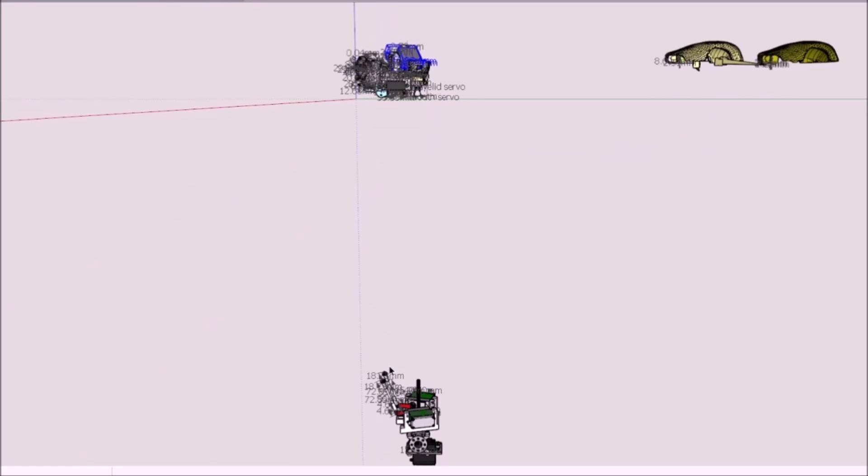And once again, you'll have these servos connected. You'll have 3 channels. You'll have a mouth, eyelids, and then the ears. And the ears have a Y cable with a reverser, and that works.

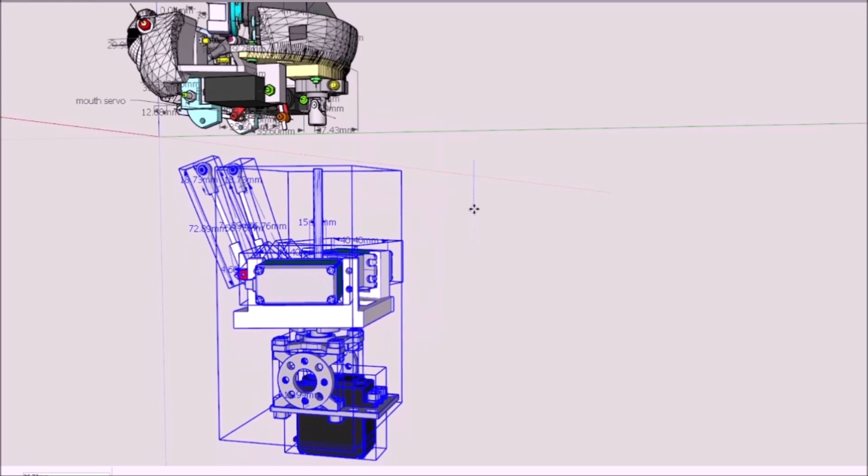And then as far as the gimbal, the main part of the gimbal is the Servo City. That's the servo block. It'll be sandwiched with a 3D print, as you see here, to a hub, and the hub is connected with 6-32 screws, and you just screw them down. Connect that first before you put in the servos, and the servos will just be bolted in. I'd prefer little bolt screws, probably 6-32.

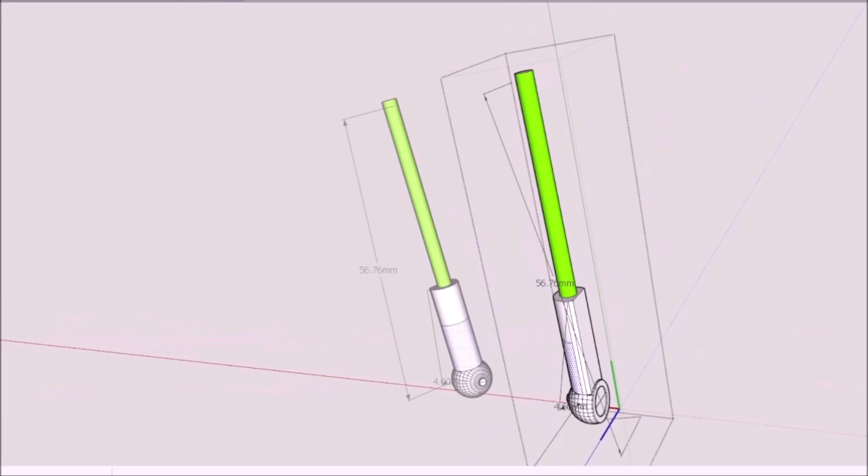And then your main rod, I told you to order. It just slides down. That rod needs to be cut to 100 millimeters, and it slides all the way down. And it will be a stop. And you just connect it to the U-joint, and these have a ball joint on the servo arm. But if you can't find the ball joint, you'll have to use the so-called ball links, as you see here at the top. This rod here is a 4-40 rod.

These give a little bit more support, and you'll just connect it to the servo arm and connect it to those little 3D parts right there, and it works great. Just thread it with a 4-40 screw, and then these ear parts are just mainly for looks.

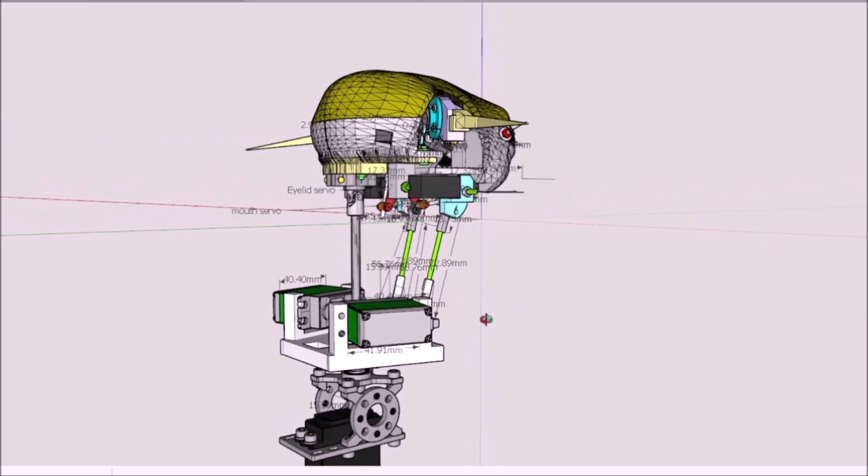I don't believe they would support skin, but I'm in the process of designing that part for the people that are wanting to put skin on, and I'll send those parts to you. They'll have a place for a rod that you can put in there, and then you put this lid on. This is the one with the pegs, and it'll just pop in place, and it works like a charm.

Well, I just wanted to show you that instructional video on how I got the Grogu up and running. But as you see the size comparison to the one we're working on here now, and I designed the Grogu probably a year and a half, maybe 2 years ago.

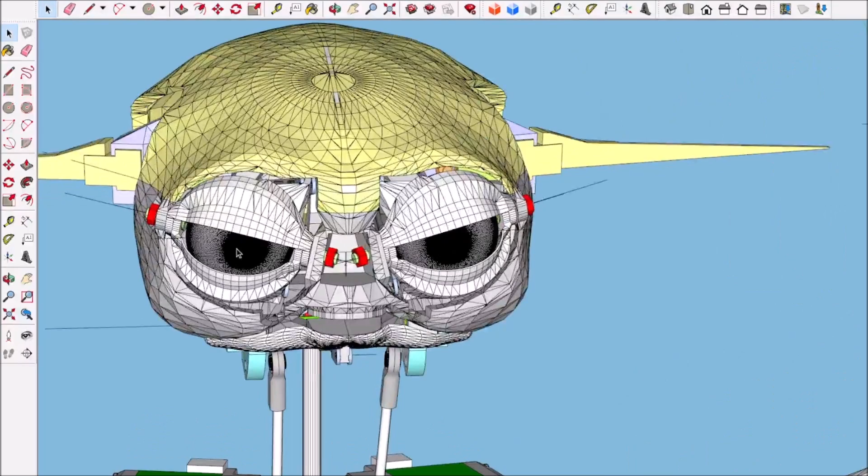But as you see here, like in that nose area, the 2 nuts, the space that I had to design it, being so close together, it was a challenge because, once again, it was something that was pre-existing, and I had to make something inside of that so-called measurement that we were all coming up with. And I'm designing the alien, or this so-called 3D printed creature that we're doing, and once again, it has to be according to a certain size, but that's the size of the build platform of the large resin printer.

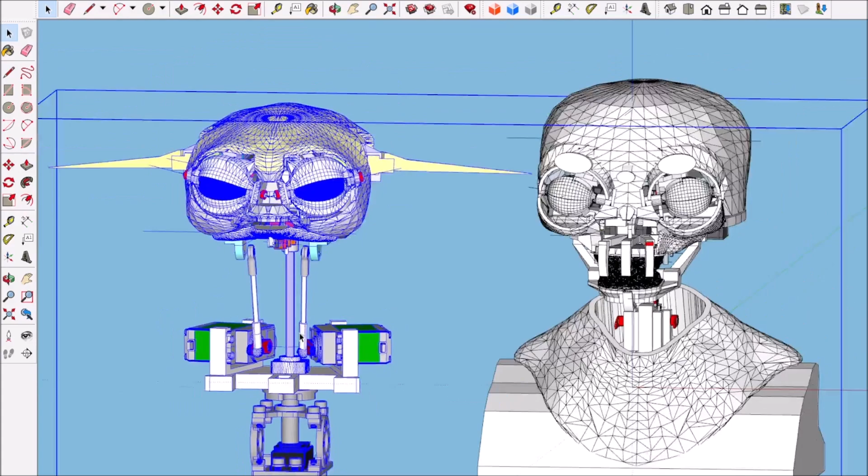And plus, on top of that, the Grogu has 6 channels, and the creature that we're making is going to have 10 channels, and we're going to have a lot more realistic movements. But you see the nuts there on that Grogu where the nose is. That was a tight fit, but I have made tighter. But I just wanted to show you this and show you the size comparison, and just show you other animatronics.

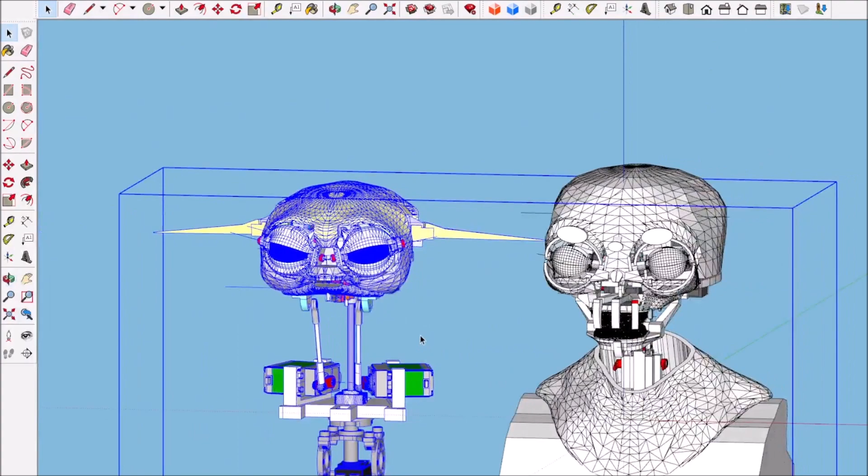And these eyes right here are floating because they're countersunk screws in the eyelids, and those eyes are floating straight ahead. Even though the eyes are tilted at an angle, they're still aiming straight. But these eyes on the creature we're making, they are beads. So that's a lot easier for us to do, just having control eyelids like this, than having like the Grogu.

But once again, I had to get a Grogu part in the skull lid. The skull piece had a magnet that I put to attach the skull to the other part of the skull, and it had a measurement. And since it's part of my library, I can go in there and just copy that socket, and I can move it to the side.

And now, when we make the skull lid to the creature that we're making, I can use that same socket, and so we can insert neodymium magnets in there so we can get it just to snap on and snap off.